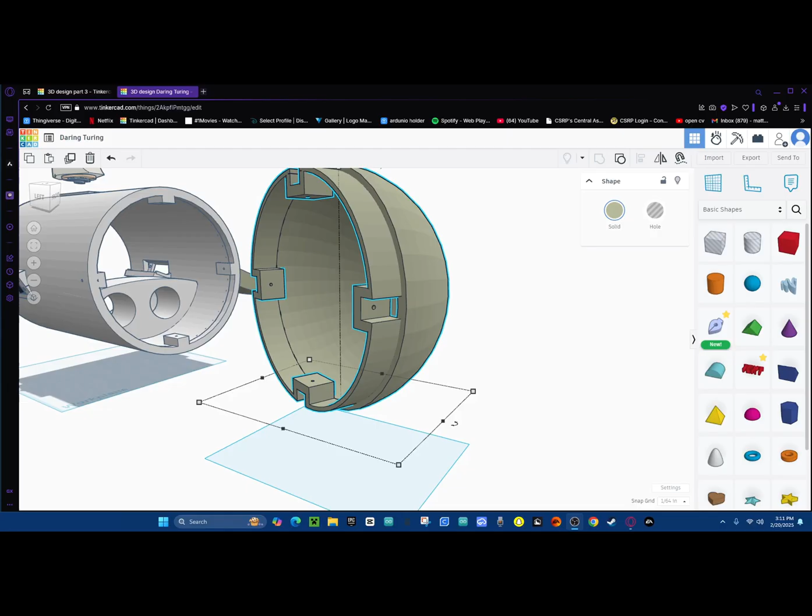Alright guys, so here's the recent changes I've done to the design of the submarine. I haven't worked on this in a while, but I'm finally picking it back up because I want to get this done and work on something else. So here are some of the changes that I did to the parts of the submarine.

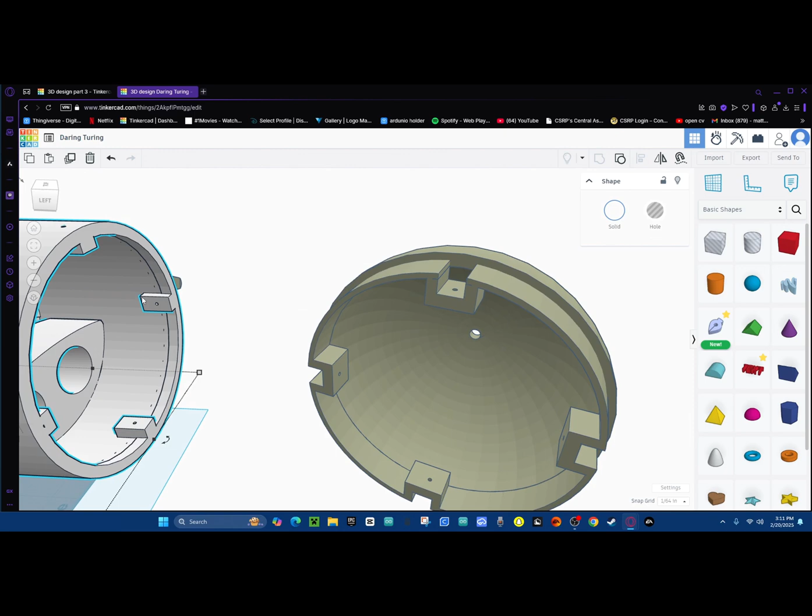The first thing I changed was the way I was going to attach everything. So now the way I'm attaching it is that this cap goes on the top of this, and these squares right here, they go into these parts right here. And then as you guys can see, there's holes on the outside of the submarine itself, and you just screw it in and it should lock in place.

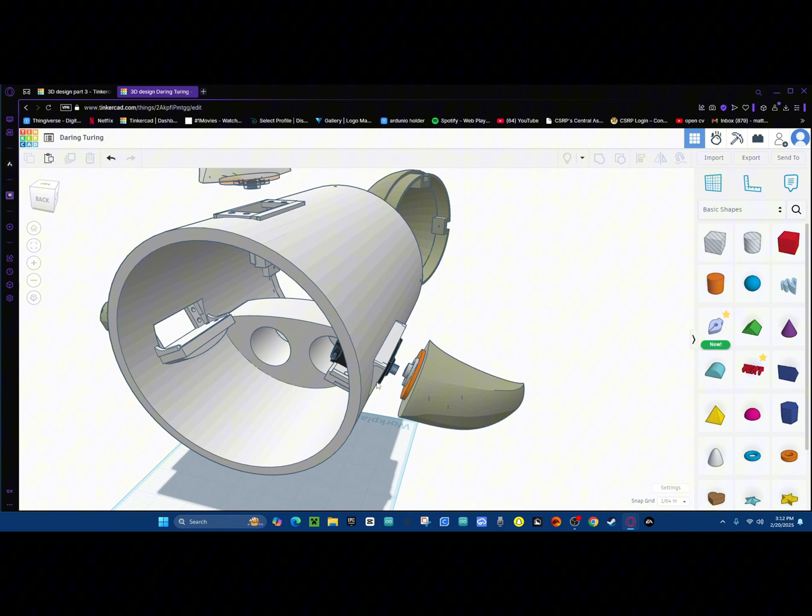And another thing I changed is the way that the rudders work. So before, the way I had it was it would be in a completely different area in the submarine, and it would control the fins by using metal wire and attaching the servo horn onto the rod that will connect. It would connect two different fins, like horizontally and vertically. But overall, I didn't really like the way it looked or the way it was designed, so I changed it to have just 3 of them.

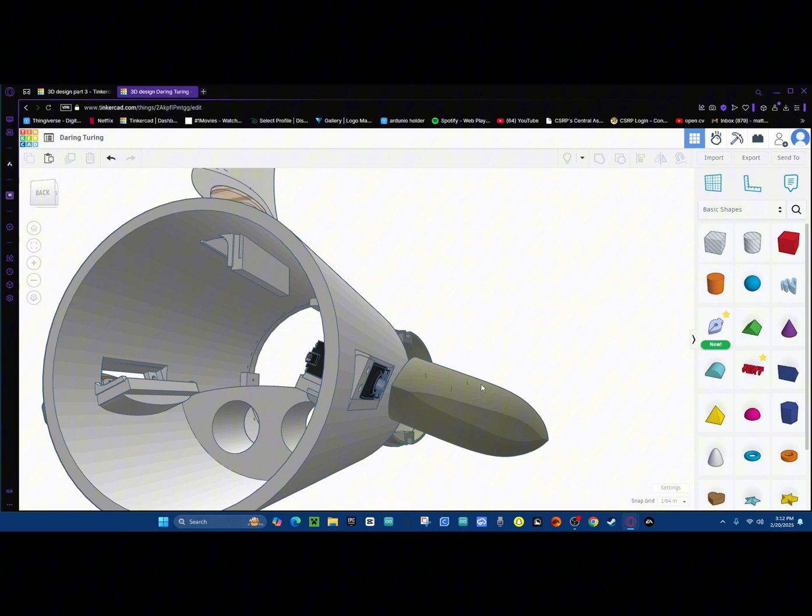And I also changed the design. Before, I had them looking like boat rudders, but now I found a 3D model of a shark fin, and I like the way this looked a lot better. So I changed it up a little bit and just attached a little servo horn on the bottom of it, so it attaches straight into the servo and should be good.

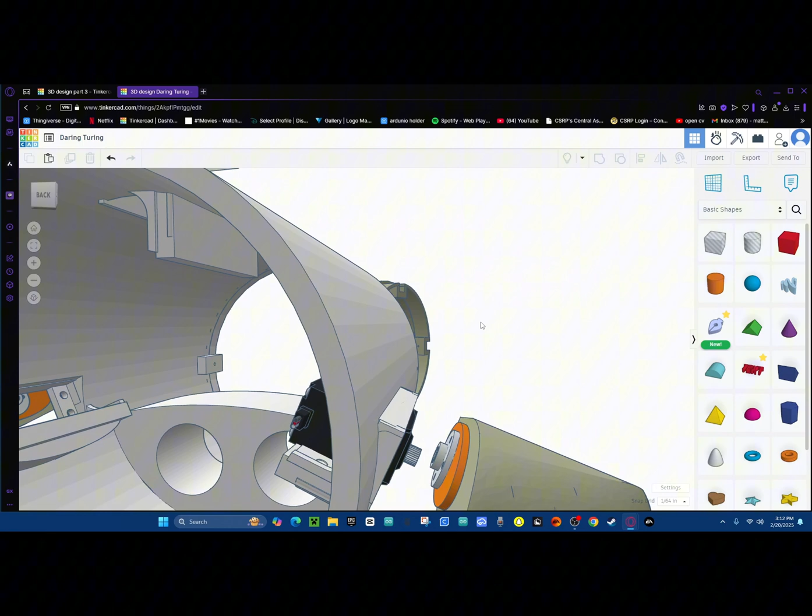The servos here, you might be asking, why am I leaving them on the outside? Because they're gonna get water damage. Most RC servos already have some type of waterproofing, but I'm gonna waterproof it even more so that it doesn't get damaged. And then the brushless motors also just sit right in that little hole. That design hasn't changed, and that's all I've changed recently.

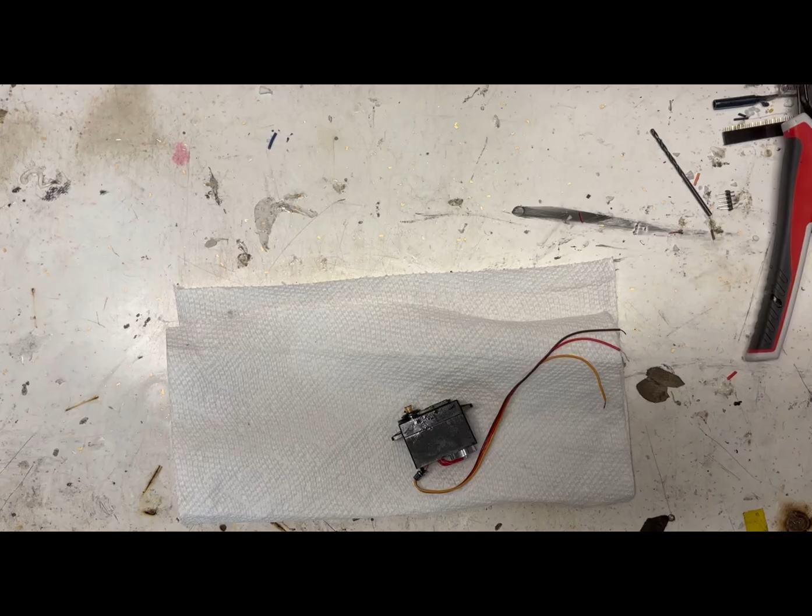First step is to waterproof the servos. Okay, so here, instead of using a water sealant, I decided to just use a soldering iron so I could just melt the plastic at the motor seams so that no water could get in. And this was pretty quick and easy, it only took around 1 or 2 minutes just to melt all the plastic around it. And then right afterwards I could just start filling it up with oil, and it was a lot faster than using a spray water sealant, because then you have to let it dry and all that. Plus this is just cheaper and easier.

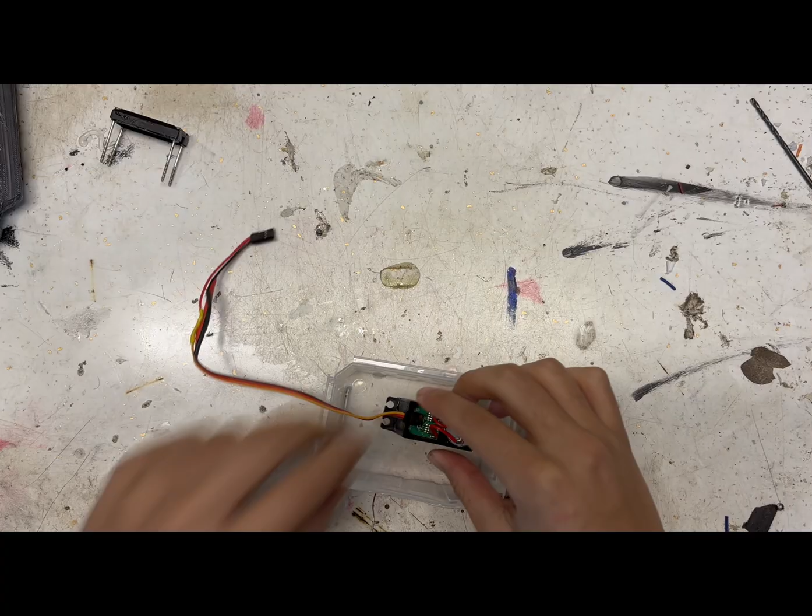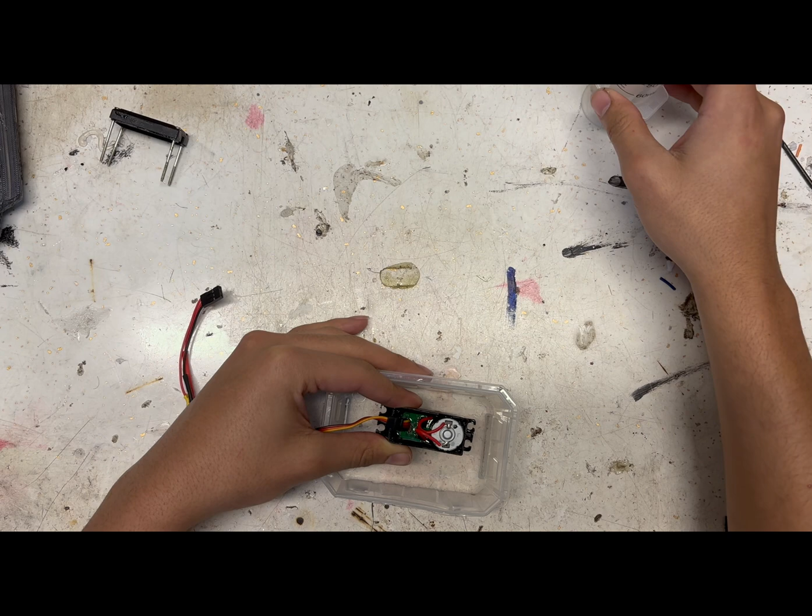Okay, so now to actually waterproof the motor so no water gets in and short circuits the motor controller, all you're gonna do is just get some mineral oil and a syringe and just start filling up the inside of the servo with the mineral oil. The reason why this works is because mineral oil is non-conductive, so it's just not gonna short out, and also if water comes in, it's not gonna hit it, it's just gonna hit the oil. So it just helps keep the water out, and overall it works underwater. So now I'm about to test this out right after I finish filling this up with oil.

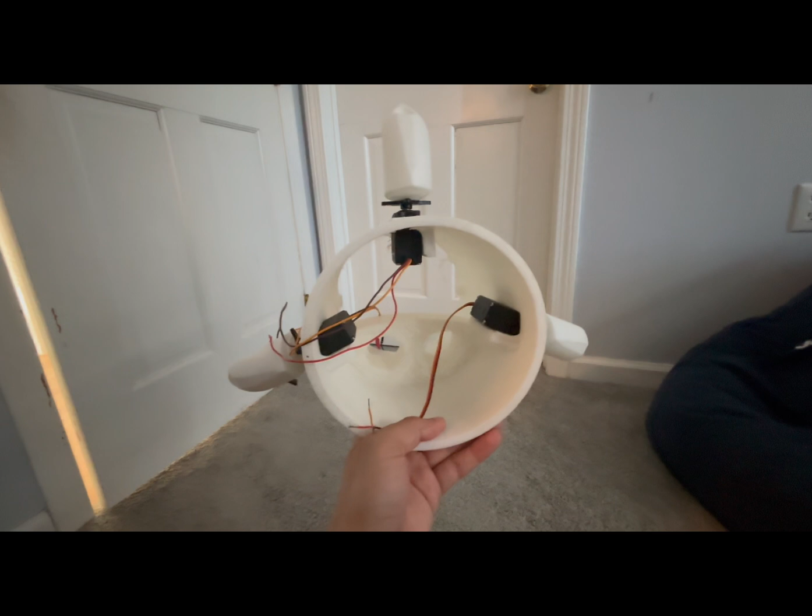Alright, so I finished printing and I attached the servos onto it, and I also attached the fins to it, and this is what it's looking like. And I honestly really like how this looks compared to the last one. This one looks a lot cleaner, a lot better, and the way I attach the servos is also a lot better.

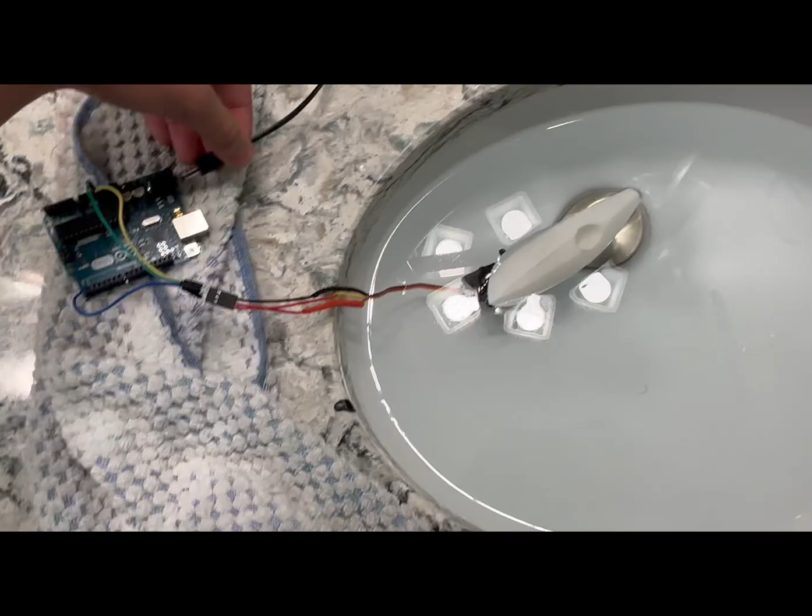Okay, so now I'm about to actually test it, and once I connect the Arduino to the power plug, the motor should start moving. It's not fully submerged yet, but once I fully submerge it, you can see that it moves underwater as well.

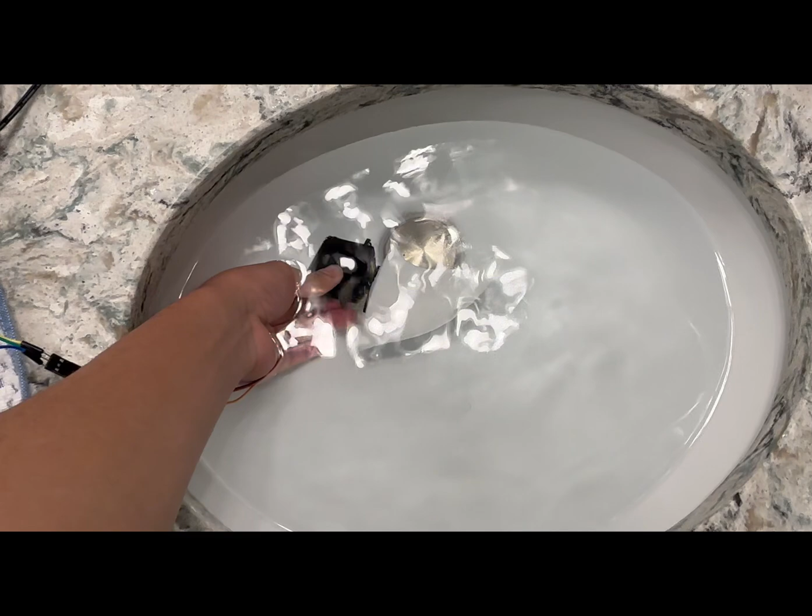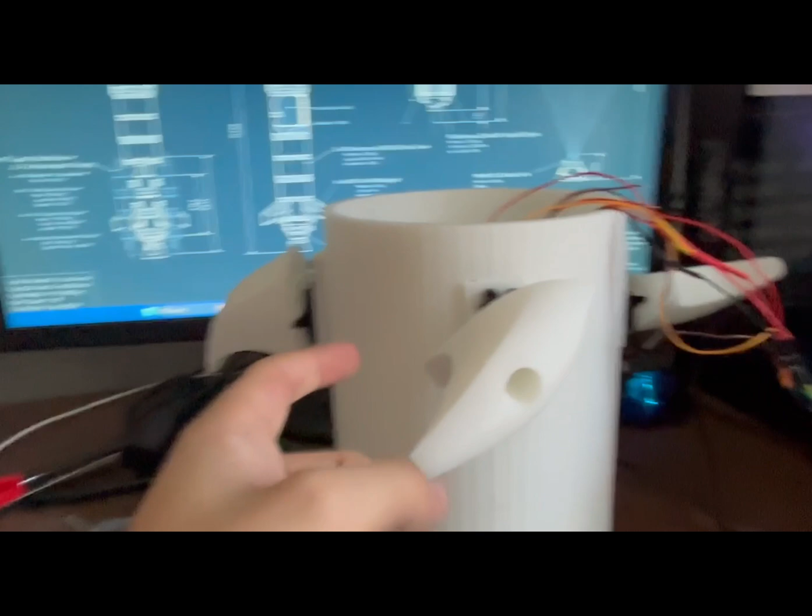Okay, so I wrote some code for the servos to test. 2 of the fins are working right now. On this fin, the connectors for the servo came off, so I just have to wait for my solder arriving tomorrow so I can test it. So we're just gonna be testing this fin and this fin to see if it works. It should just spin 180 degrees back and forth a couple times. Yep, so it's working.

Now I gotta work on the battery system. Series versus parallel in wiring. This is a battery, specifically an 11.1 volt 2200 milliamp hour battery. Now we have 2 batteries, and if I wire them in parallel, it's going to come out to be 11.1 volts and 4400 milliamp hours.

Now you may ask me, what are the pros and cons of wiring it in parallel? The first pro is that it has an extended runtime, meaning it has the capacity of both of the batteries, which equates to 4400 milliamp hours, and basically it just doubles my submarine operational time. Keeping the voltage at 11.1 volts just overall matches the requirements of my components. Wiring it in parallel generates less heat than wiring it in series, so it just enhances the longevity of my batteries and all my electronic components.

Since it's not that high of a voltage, I don't have to use any buck converters to connect it to any of the components, other than just connecting it to the servo and the ESP32, and it's just a lot safer overall. And here's the cons. It weighs more, it's weird to wire, it can charge unevenly, it could also overheat, and the voltage doesn't increase at all.

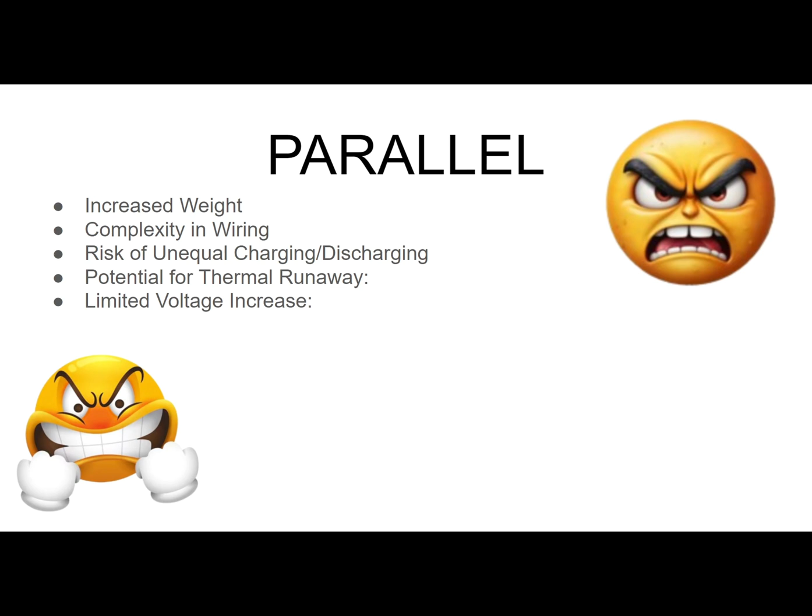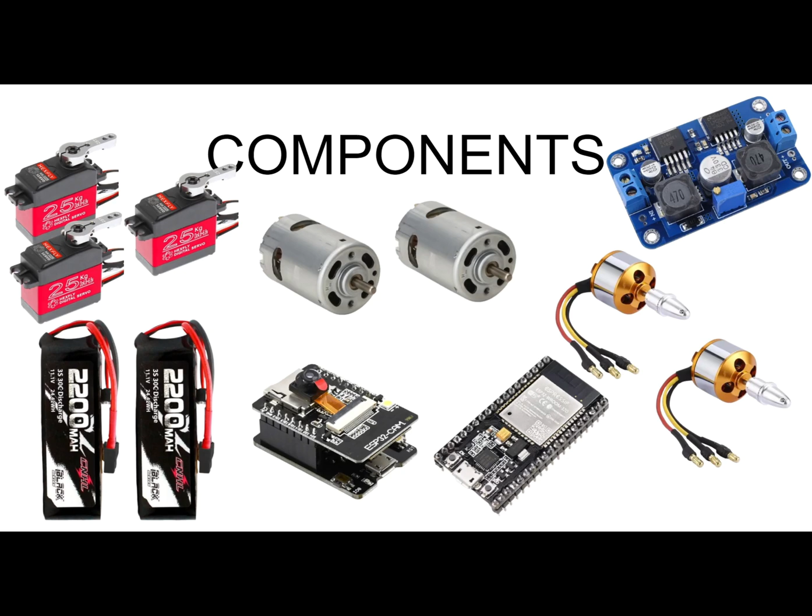So here are the list of components. We have 2 batteries, 3 servos, 2 DC motors, 2 brushless motors, an ESP32, and also an ESP32 cam, and if we need it, I'm also going to use 2 buck converters. And after thinking about it and inputting my specs into ChatGPT, I decided to just go with parallel.

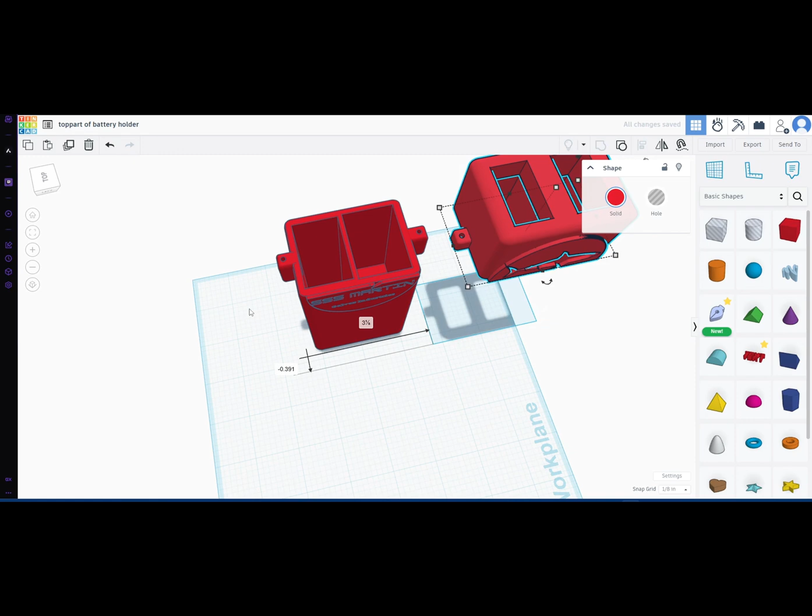Now all I gotta do is just design a battery pack. It's a very simple design. It's just a box with screw holders on the side and also a logo in the front. So basically all it does is just hold the batteries inside, so the batteries just slap into there and the wires come out from the top right over here.

Alright guys, so now I'm going to show you guys how I built my battery pack. So the first thing I did was took some measurements of these 2 batteries that I have, and then I put it into the 3D printing software and designed a little holding case for it. So they really just sit in like...

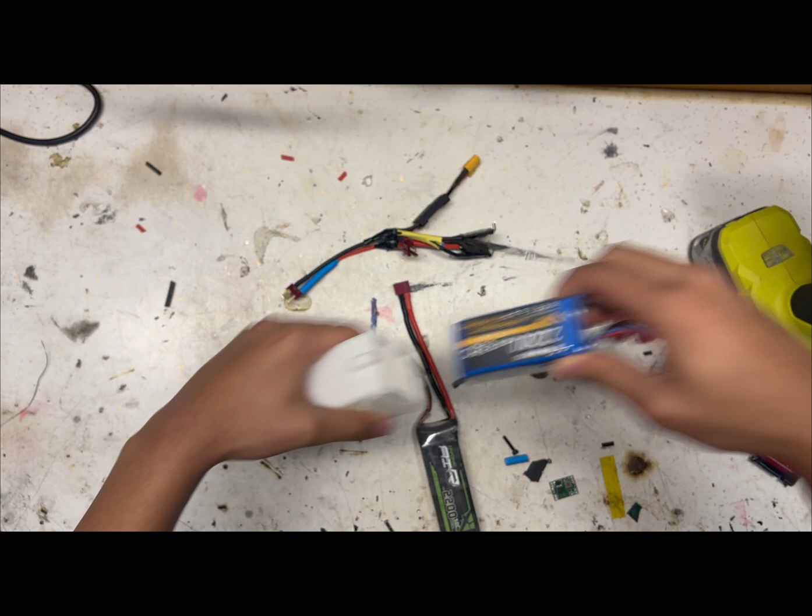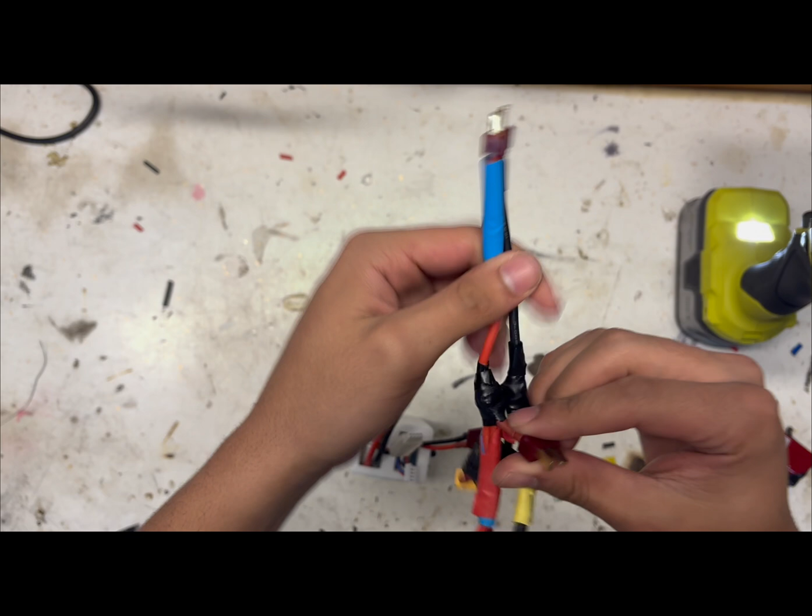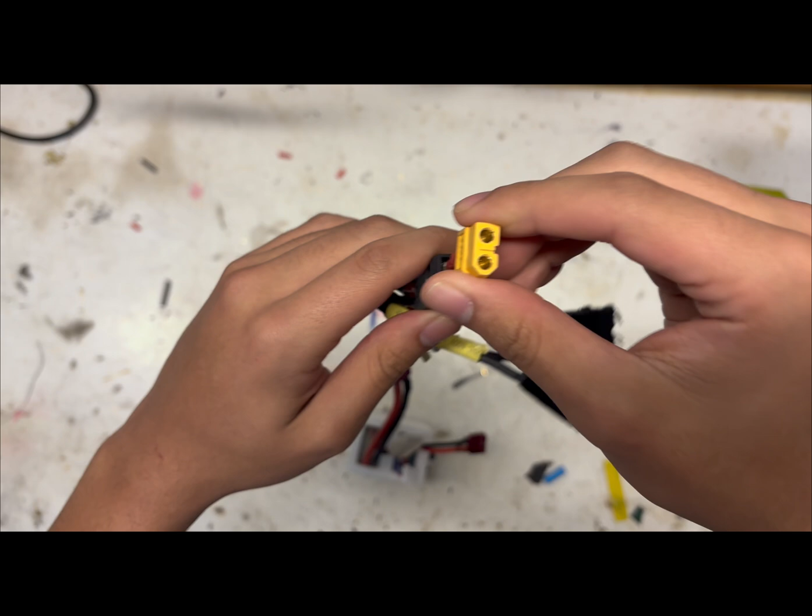Okay, so now you got your battery pack, and then the next step after I 3D printed this was I started working on a 3-way splitter. So in this 3-way splitter, it has 2 Deans connectors, so they just connect onto the battery like that. And then I connected 2 mini buck converters, and I wired them to the splitter that I made for these Deans connectors, so that I wired them in parallel. So the positive is going to the positive, and the negative is going to the negative. And I also put one of the adapters so that I could attach this onto the brushless motor ESCs.

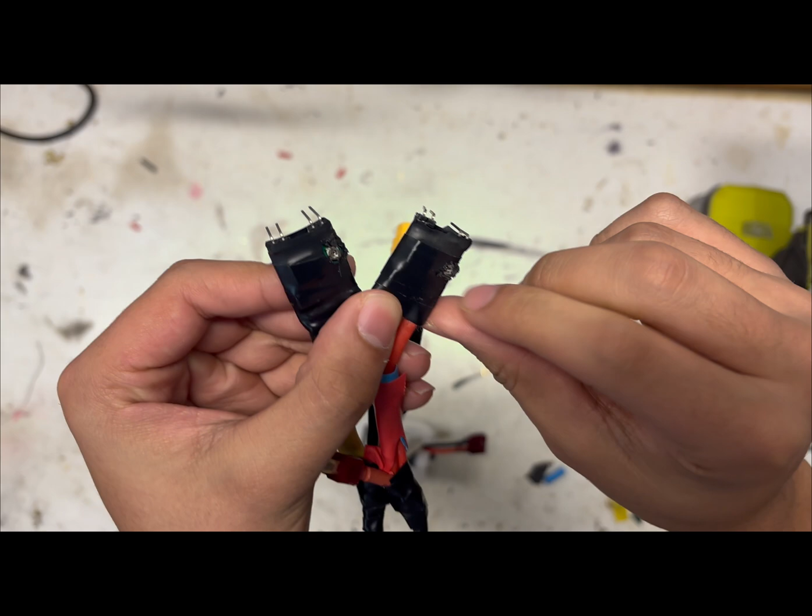And then all you do once you wire them is secure all the wiring, so I just used a bunch of electrical tape, I soldered it all together, and I used heat shrink tubes. I would also suggest, if you're doing something like this, to put some heat shrink tubes around the mini buck converters. That's what I did right here. I just made a little hole on the side so I could use a little screwdriver to adjust the voltage. So once you connect them to the batteries like so, if they don't explode, that means it's good.

So the way I'm going to test this out is I'm going to grab my Arduino. You guys see it's not turned on right now.

Now all you gotta do is just focus on this light, and once I adjust the buck converter so that it allows some voltage through, the light will turn on. So you guys see it turns on, and when I just unscrew it. So that's basically how this works. And now since I know it works well, that means I wired it well, so nothing will explode. So yeah. So I decided to redo my ballast system.

The reason I'm redoing my ballast system is because it's too big, and I want to keep one in the front and one in the back. I had a rack and pinion system, and it was just way too big and way too complicated. So instead, I'm gonna turn the DC motors into water pumps.

It's pretty easy. I just found a design online, changed it up a bit so that it could fit the motor that I'm using and fit how I wanted it to work. So I printed it out, and the way it's gonna work is I'm gonna cut 2 pistons to 30 milliliters, and then connect the pistons together through the tip, and then connect the 2 from the water pump to the outside, and then the other side of the water pump, I'm gonna connect that into the syringes.

So once the syringes fill up with water on both the front and the back, the submarine should sink. Guys, I'm gonna show you how to build this water pump. For me, I built 2 water pumps, but I'm gonna show you how to make a single one. You need 1 motor holder, 1 fan, and 2 connector parts. Then you're gonna need the electronics, like the motor. That's all you need for electronics, and you need a couple screws.

The way you're gonna put this together is you get the motor first, and you get the motor holder, slide it into the top, clip it in, and once it's at the top, you should be able to free spin this with your hand. If it's a little too tight, I'd suggest using a heat source. I use my heat gun to loosen the hole a bit and move the axle around so that the axle has free spin. Next, you're gonna put the little fan on top. The best way to tell if the motor is spinning is you can check in the holes. If you see the axle spinning, you should be good. Put that in there.

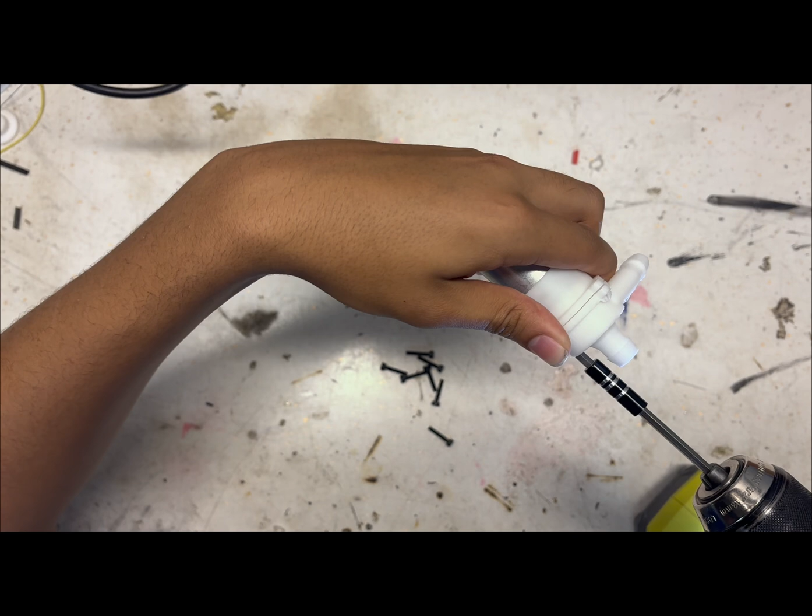Next, you're gonna grab the top part and put it there. You're gonna grab your screwdriver or rotary tool. For me, I'm using a drill. And you're just gonna screw in every side. This is the first iteration of the water pump I made. So we're gonna test this out right now.

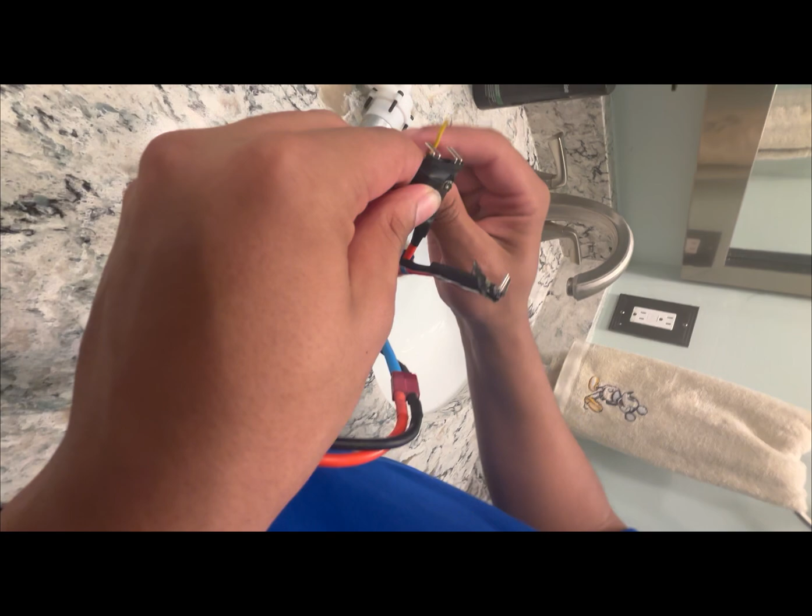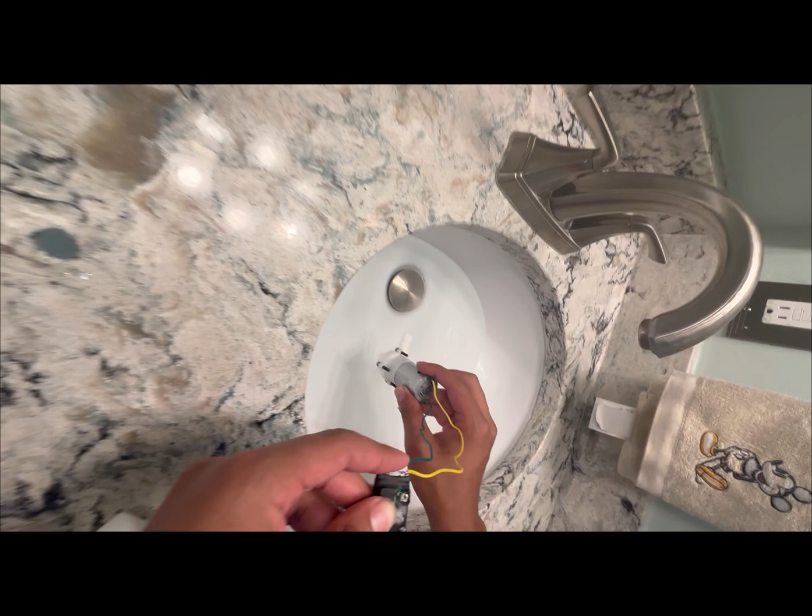This is with the battery pack that, as you guys know, I've made in the past. So we're just gonna connect. It's gonna start running automatically. And once I dip it in there, see, it's working.

For my next iteration, the things I'm gonna change, I'm about to 3D print it. I'm gonna see if I can get a bigger gear, because right now the gear is pretty small, so that limits the amount of water that's coming in and coming out. This is basically just a fan. Once it runs, you can feel the air getting pushed out right here. So it's just redirecting the water as if it was an actual fan.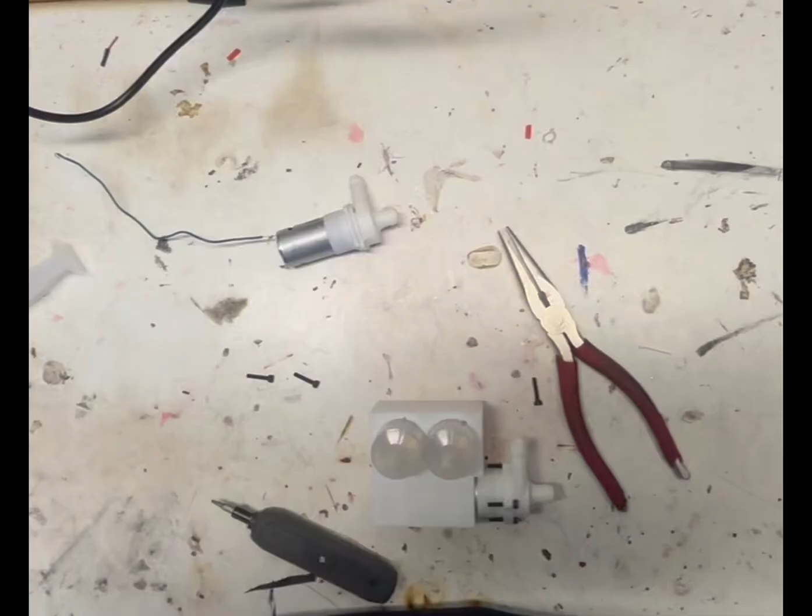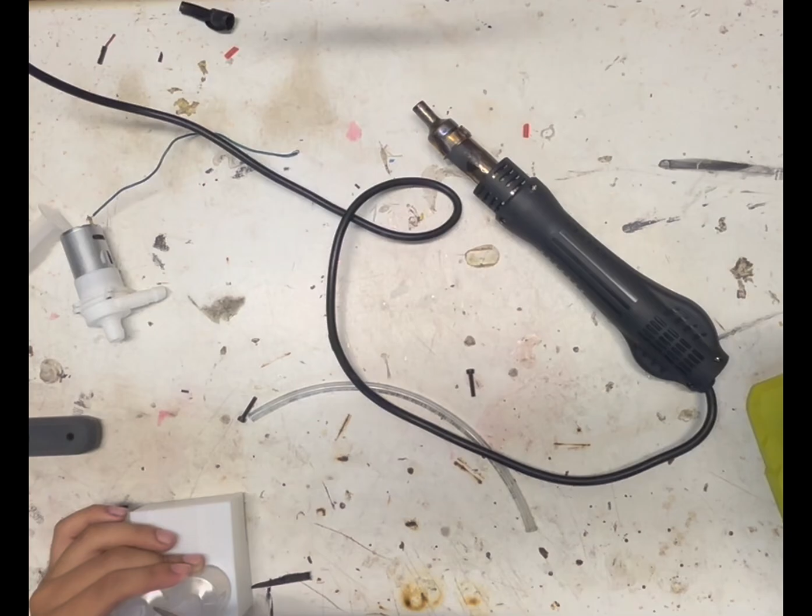Okay, so here was my poor attempt of melting the 2 tubes together, and it didn't end up working, so I ended up doing something else. But while I was recording, my phone ended up dying. Here was my poor attempt of trying to connect everything together, and it just wasn't going well. So my phone did die, but after wiring everything together, trying to bend it inside the other one, it actually kind of works. I'm going to show a video of me testing it out right now.

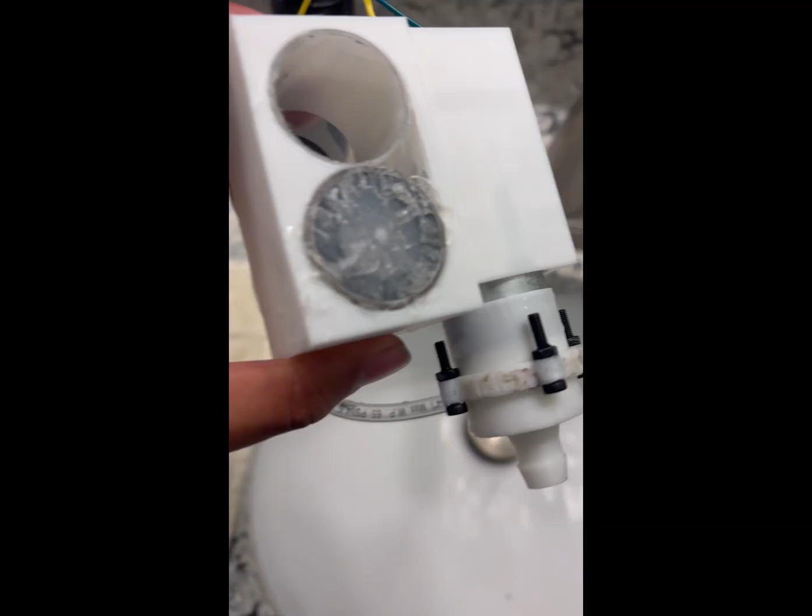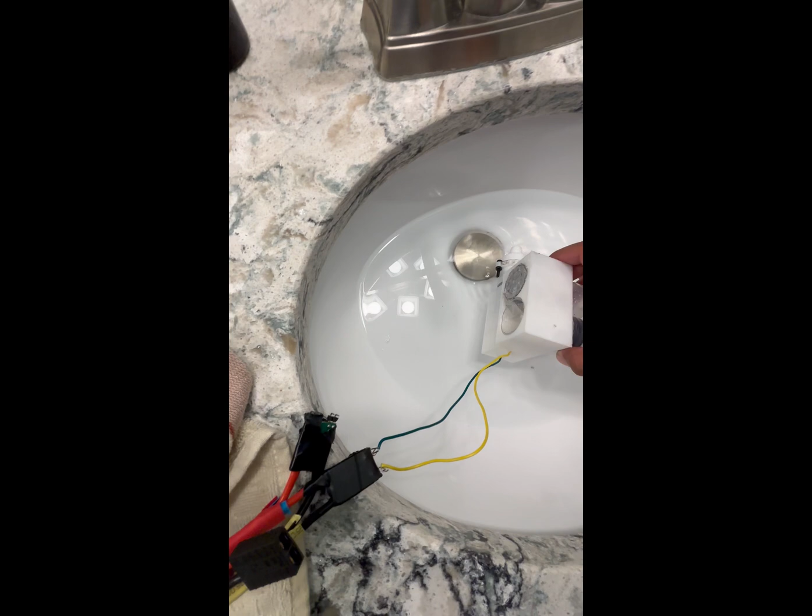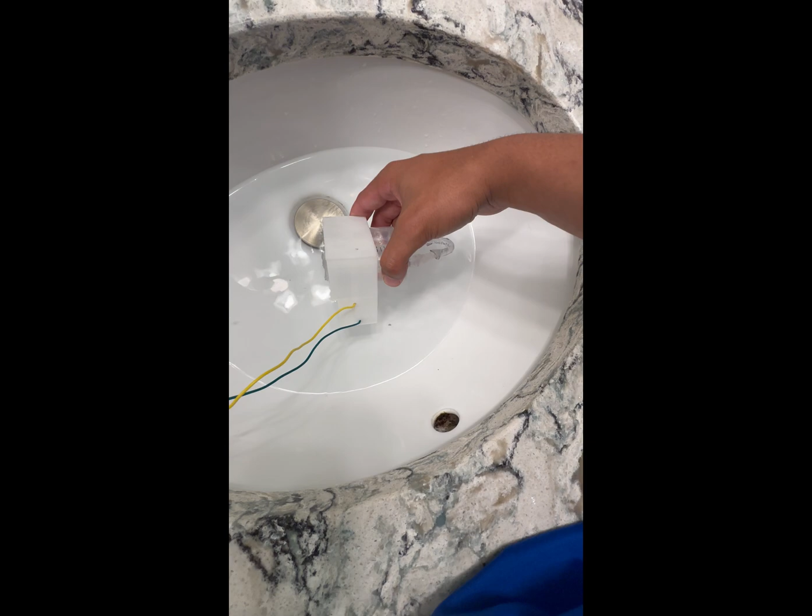Alright, another update. I had to cut off the bottom of the stick that goes inside the syringe. Cut it off, welded it to the top, and then cut the other one, but left a little bit on the top, so if I need to pull it out with some tweezers I could. In total this should fill up around, give or take, 50, 60, and it needs around 90 milliliters for it to sink, so 2 of these should work fine. Alright, just like that. Now both of them are full.